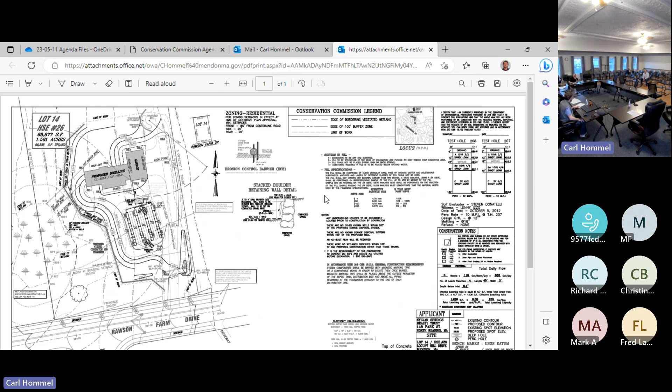All right, so here is the plan for 26 Rawson. This is the notice of intent submitted on behalf of Sylvan Springs Realty Trust by Fred Latham, their engineer, for work involving a single family home. Take it away.

Finally back on, and everybody's got the information. So this is a single family house, lot 14 on the subdivision plan, house number 26. This was one of the lots in the original subdivision that was approved back in 2006.

It is a 6-bedroom house, so for the septic we were able to design the driveway, septic, and placement of the house so that we comply with all the conservation minimum setbacks, as far as building setback and no-disturb area. The no-disturb is outside of our work area.

This has been approved by the Board of Health, and the state DEP Wetlands Division has issued a file number with no comment on the filing. So I'm hoping we can answer any questions anybody may have regarding the design, and move forward with the project. If anybody has any questions, I'm ready to answer them.

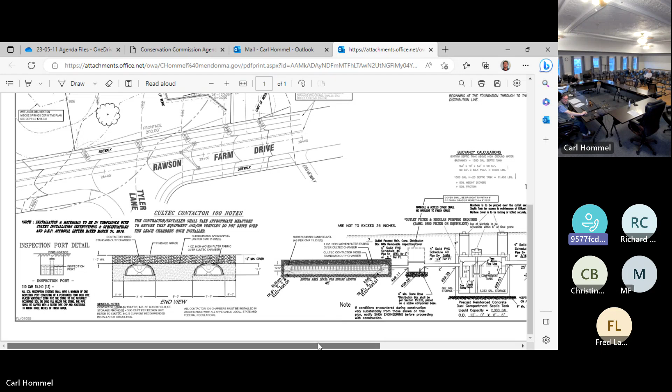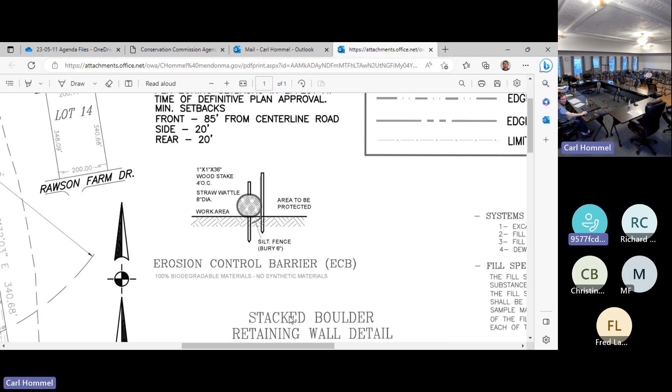In one area we had to provide about 42 feet of boulder retaining wall so we can meet the minimum distance of 25 feet from the wetlands. I can see that we do not have the construction detail of that erosion control. Oh yeah, you have it right there — this is how the silt fence is. Just want to see it. Yeah, there it is.

Something like that. Now, is the boulder coming off the property itself, Fred? Could you repeat that? You're showing us a boulder wall, stone wall — is that coming from the property, or are they bringing stones in? If we find them during excavation, we'll use them, but they have plenty of places to find large boulders on that site. Usually when they're breaking up rock for the roadway, they have a stash pile of boulders suitable for these boulder walls.

We have vegetative cover wherever we can, but in a short section we like to avoid the wall if possible — it's a maximum of 4 feet. I think this one is a maximum of 3 feet in the construction detail. 3 feet. Fred, is Gentis still doing the site work up there?

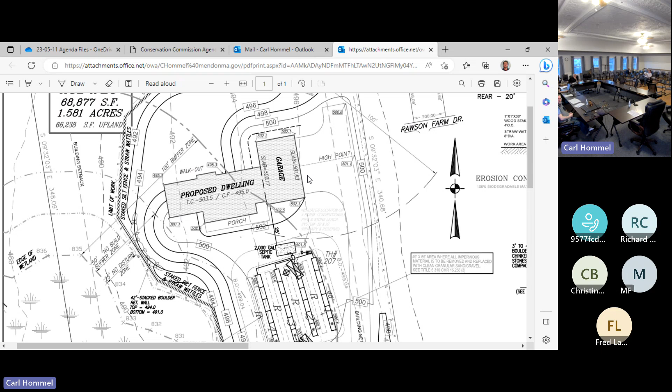We haven't shown any downspouts, but if we're out more than 50 feet from the wetland, the downspouts come to daylight. If they're underground, they'll come to daylight within the work area and be part of the runoff. If it's roof runoff only, it's considered clean runoff — rain not mixed with roadway flows. We allow that to travel over the upland area down to the wetland, since there's so little flow in a downspout, there's plenty of opportunity for it to spread out.

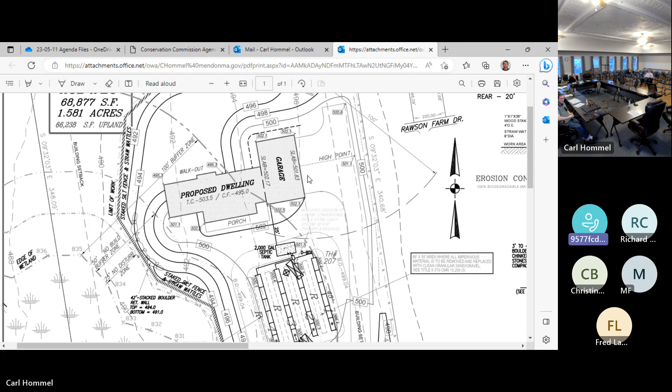Most of it will go back into the soil, and what doesn't will be overland flow to the wetland, just like rainwater. Okay, I don't agree with that for a downspout — if you connect the downspouts into a French drain around the whole house with a walkout in back at 495, your concrete is going to be down low. It'll be hard to get it to daylight and keep it within the limit of work, won't it? No, because the house is up in elevation — the cellar floor is at 495.

I'm sorry, what was that? Tim's telling me the standard practice is not to put downspouts into the French drain — but you're saying you would be putting them in? Yes, all of these houses going up this hill will have foundation drains. But they don't necessarily go to daylight — is that what you're telling me? No, they do go to daylight. The downspouts won't be directed to the foundation drain.

They'll just go to daylight as soon as they can. The cellar floor foundation drain is going to be below cellar floor elevation of 495. At the edge of the disturbance, the limit of work, we have an elevation of approximately 491, the existing grade. So there's plenty of vertical separation between the foundation drain, and it will daylight in that far left-hand corner of our work area. That is elevation 491.

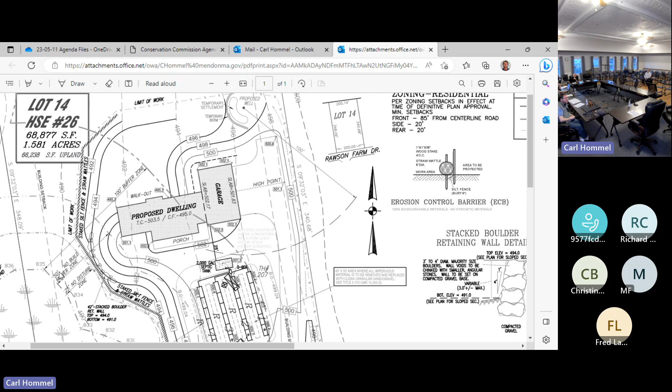If we're talking about the house drains, I wanted to ask about runoff from the driveway. The high point of the driveway is right on the edge, 501 feet. My concern is what will be done to make sure the water from the driveway near the garage doesn't get diverted across the septic system area and flow quickly into the wetlands. Is it going to be graded so the water flows down the driveway or off to the side, the far side of the driveway?

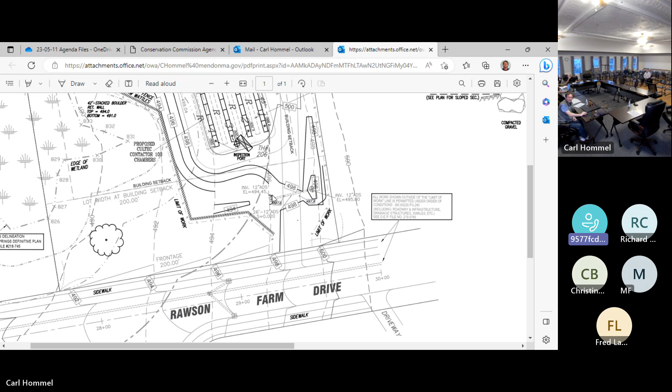At the bottom he's got a swale there, with a grade down. Most of that driveway has a swale on the uphill side, so the overland flow that would come from lot 15 and go through lot 14 is allowed to continue to flow, and it's diverted by swales to the right and left of the house and septic area. The swale continues down the driveway towards the street, and we have a low point where the pipe elevation is 495, and it goes under the driveway, kept up so the swale can be built. The low point of the driveway is at the edge of Rawson Farm Drive.

So that flow will be cleaned through the function of the detention basin that it's directed to.

Sorry, what? Pardon me? It gets turned off. I just heard part of that. I'm waiting until we can fix his phone line.

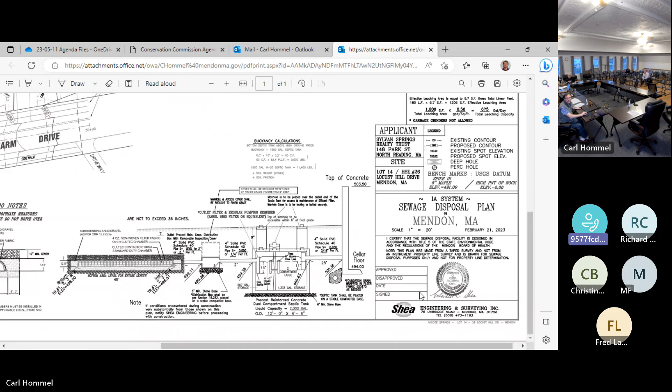On the diagram, when there are two short dash lines and then a dash line going the opposite direction, does that mean a swale? No, that's the fence. Those arrows are flow directional arrows. I believe that's in the legend -- well, not the legend exactly, it's not shown in the legend that shows test hole symbols and such, but it is a flow direction arrow, and we label it as swale.

Most of it goes to the front, part of it goes to the back, so it's spread out somewhat by that. So the expectation is the water would flow down the driveway, get to this point, and then get diverted into the street area. Yes, it's a continuous down pitch right to the pavement on Rawson Farm.

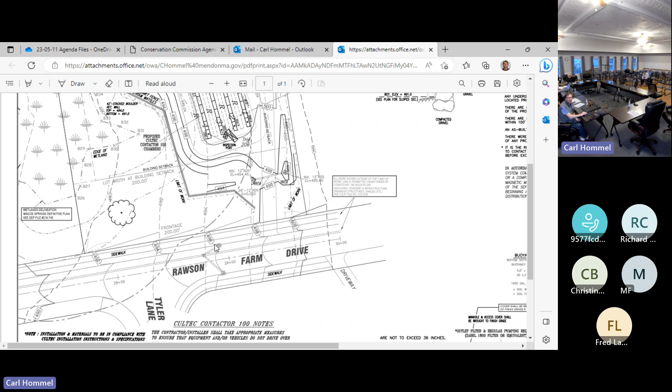Is there a storm drain somewhere along the road someplace? Yes, those two there, catch basins. Okay, great. So I figured -- is the highway department going to be okay with you diverting all the water onto the street, Fred?

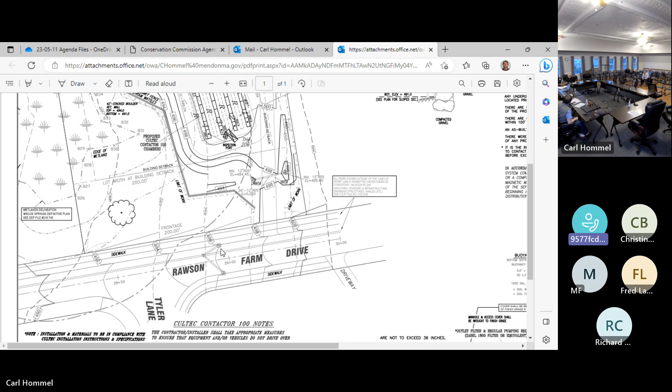Yeah, it's part of what we do all the time. It's part of the drainage design. When we came in and got approval for the subdivision infrastructure, that drain system is designed to take this water. So we do have that in our design.

Any other questions? The application has been successful at shoehorning in to stay out of the 25-foot no-disturb zone. I don't like having things done 50 to 100 feet out because of the lot and topography. So any other concerns, or should we have additional constraints since everything is getting very close to the edge?

There's documentation in the plans. I'm comfortable with it. All the work they've done up there to this point has been on all the lots. It's very conscientious of what they do up there, and they do a pretty good job at it, so I'm comfortable with it.

He's been doing it for 2 or 3 years now, and I have no problem with this, but let me just throw it out for general discussion. When you have lawns near a wetland, is there any instinct that we should limit the fertilizer?

We have done that in the past in our orders of conditions. That's a really hard thing to police. I mean, we can put it in there. Yeah, I know you need the phosphorus to get the lawn started, but once you get it established, you shouldn't have a problem with that as a deed restriction.

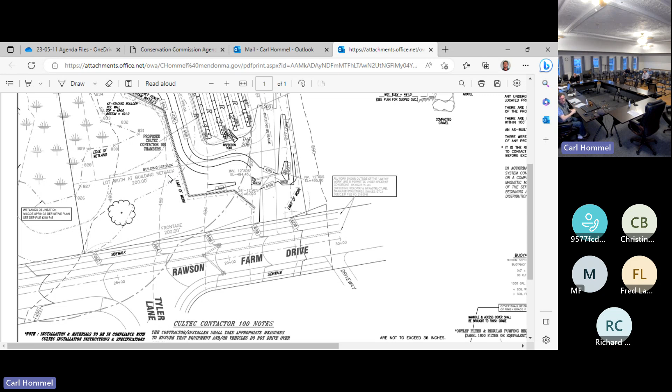I wouldn't mind, because this is like a big lawn, and I imagine they're going to have a nice lawn. We can add it to one of the lines. So I would make a motion to approve this subject to a minor request for no fertilizing after the initial installation of the lawn, in the buffer zone or something like that.

It's probably mostly in the buffer zone. Not all of it is, but most of it is, yeah.

So in terms of Susan and I knowing what's happening, approving the notice of intent, we would ask Fred to write up the order of conditions for us to approve at our next meeting. Sounds right.

So Fred, are you comfortable doing the paperwork since we don't have a clerk? Absolutely, we've done it before. Yes, we can prepare that.

Since you've already taken into account our usual issue with protecting the proposed well area, we would just have that one line about phosphorus and fertilizer. And you should be able to work with Susan, especially now that her grading hill is almost done, to make sure the paperwork gets submitted appropriately with the Mass DEP portal.

All right, so now I'll entertain a motion to approve the notice of intent with that one clause. Is there a second? Second. Any further discussion? All in favor? Aye. Opposed? Passes unanimously. Thanks for coming, Fred.

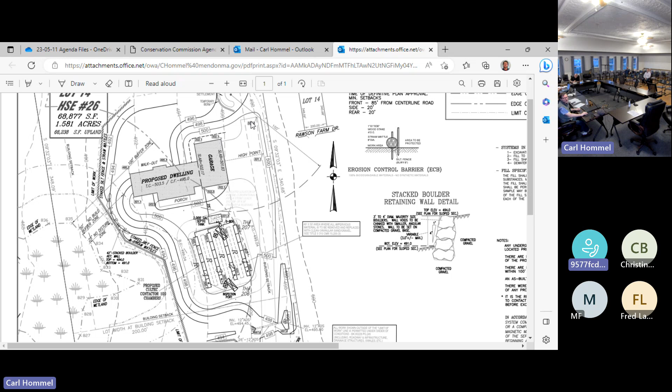Glad we were able to overcome that and get everything working. I'll try to get this camera going before I come on next time. It's a new computer, I just had it built. But I have direct access to my office and to you guys.

I'll try to get it all operating properly for the next time. Hopefully next time I'll be able to come into the meeting. It's a lot easier conducting a meeting if you have somebody there in person, able to hear better. All right, okay, thanks a lot.

Thanks, Bud. All right, we'll move on to the other one, Blackstone. DEP.

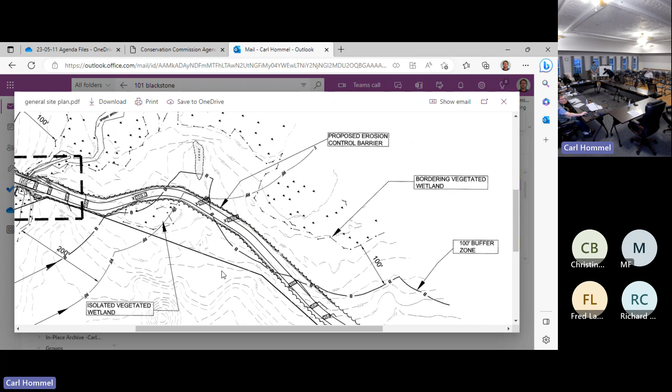Pipe will sit at 358, which is right. So what's the top of the road elevation going to be? It's about a foot. Well, it better be a foot at the bottom of the pipe. Is 358 the invert? The invert is at 358. That's correct, and you're putting in 12-inch pipe? So I apologize, no, the top of the pipe will sit at 358, so the bottom of the pipe will sit at 357.

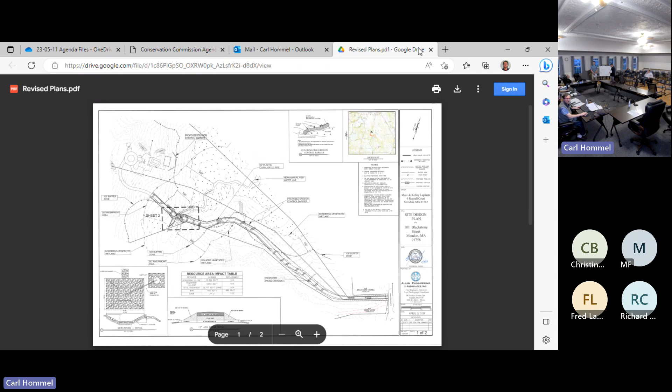I see the issue, gotcha. So I'm hoping the pipe is going to sit at the channel you dug next to the ditch, right? You could either dig it deeper or fill it, or I'm assuming you're gonna put it right where it sits. I don't know what that elevation is, but you need to figure out how much space is needed between the pipe and the top of the road so it doesn't crush the pipe.

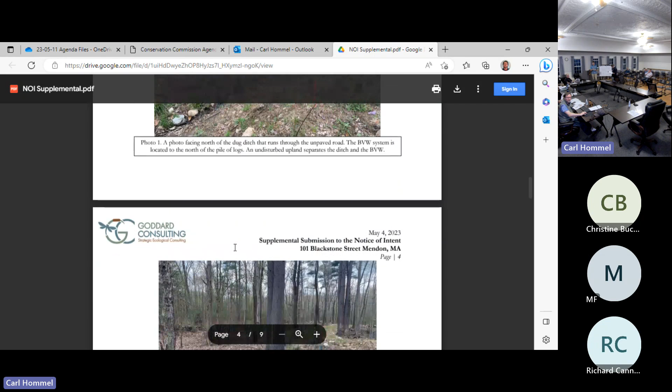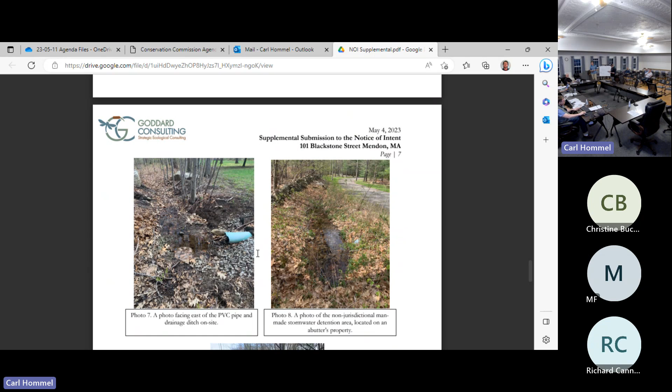Photo 8 is some kind of stormwater detention basin that he had dug to prevent the water from either cracking his driveway during the winter when it got cold. So he installed a pipe that led to our client's property and fed the water from his man-made detention basin under the driveway lawn and then spewed out into this forested area here. So what the water has done is created somewhat of a naturalized channel, which you can see in photo 7. That's on our site, and the PVC pipe is leading water out into the forest right there.

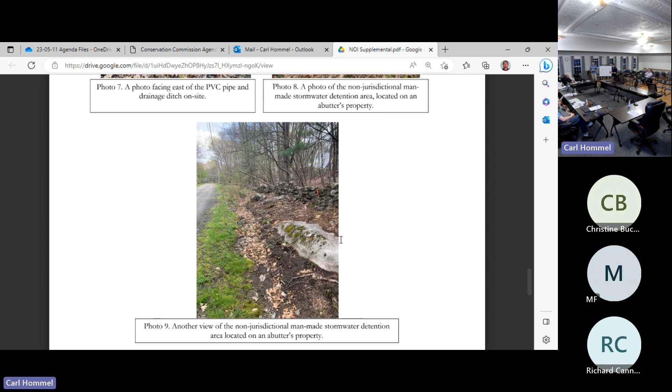Photo 8, for whoever's on the Zoom, that's the detention basin on the abutter's property. It was holding water as I was out there after a large storm event that was on May 1st. Then photo 9, if you scroll down a little further, that's just a bit upgradient of where the stormwater basin is on the abutter's property, just to show you there's no wetlands located upgradient of that at all. So I don't believe this is any kind of jurisdictional resource area. If you could go back to photo 7, because at the site...

Cinnamon fern, is that an obligate? Is it back up? So cinnamon fern is FACW. However, in Massachusetts we need two criteria for it to be a wetland. That also being said, the stream is located upgradient of any wetland resource area. And in the regulations, it says that any finger of a stream is not considered a stream if it's located upgradient of a wetland. There is no wetland, in my opinion, downstream of it, but just to get that out of the way, this stream does not qualify as a jurisdictional resource, in my opinion, based on the regulations.

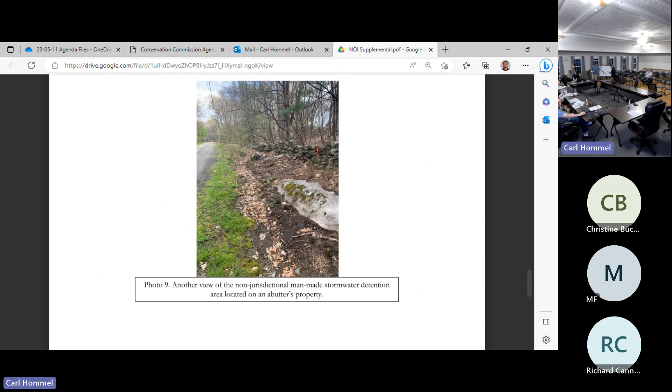It's not... this is the upland area right here. Correct, that is the stormwater ditch that he dug. Is that upgradient of this property right here? I'm not talking about that, I'm talking about the other side of the driveway, where the pipe goes under the existing driveway and then goes into some rocks, that picture on the left. Okay, now it goes off to the left.

It's not a real clear channel, but as it goes off left, it goes into an area with cinnamon ferns and it's tufted. When I see tufts, that says wetlands to me.

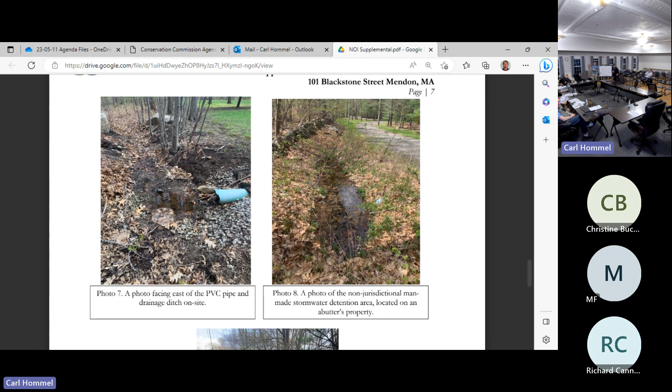If you look on page 8, that's my auger in a hole I dug down gradient of the stream. Can you put that on the map where you dug that gradient hole? The pipe comes in, the channel runs down adjacent to the road, and then the water percolates out into this open area you're seeing right here.

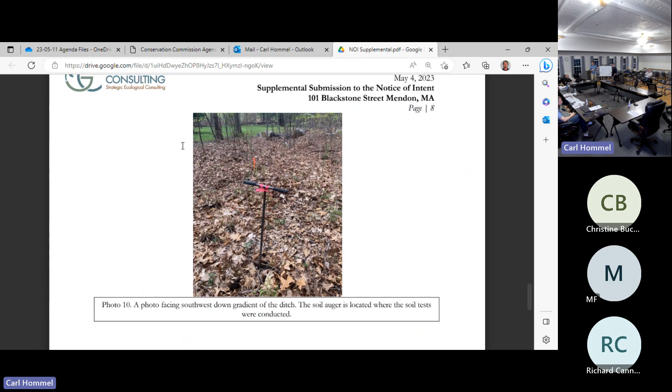It's just leaves from the oaks above, which are an upland species. Getting back to it, this is just downstream of where the water comes out on our site. That's my auger in that location. If you flip to page 9, you can see that's an upland soil I pulled from that same location where the cinnamon ferns were seen.

In Massachusetts, we need a wetland soil and a dominance of wetland vegetation for it to classify as a wetland. My opinion is that area is not a wetland, strictly because even with the cinnamon fern, there is an upland soil pulled here, so it is not a wetland under the Massachusetts Wetlands Protection Act.

Could it be a potential vernal pool? No, this is a very flat gradient area, so if there's any water, it's just going to spread out across the land.

What about the other parts, where there's this disconnect between the wetland and the stream? I don't think this area holds enough water for it to be a wetland or a vernal pool. But you could take a look at it next spring.

We're out of the vernal pool season now for that. However, it is leading out, so there's not much standing water in there because of that stream that was dug. It's kind of emptying, so it's not holding very much water at all.

What's the definition of the quantity for an isolated acre foot or something? Isolated land subject to flooding is an area that holds a quarter acre-foot of water, and this area is far too small to hold that.

That would need to hold at least 10,000 square feet of water at a foot deep, and this is not nearly large enough for that. So it's not a quarter acre. No, it needs to hold a quarter acre-foot of water internally.

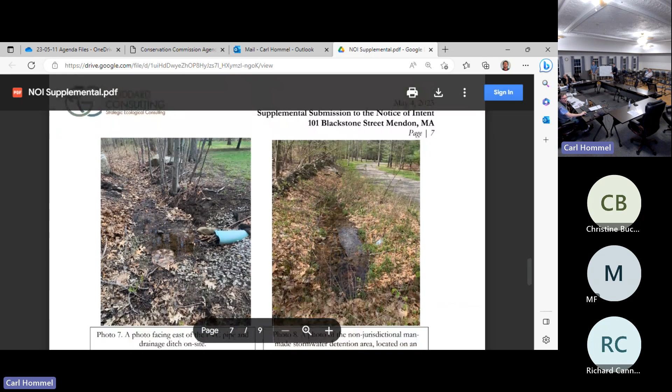So I'm not sure when he dug that ditch. We dug it when he built his house. No, this ditch was dug more recently, and someone's put stone in preparation for doing this.

How old is the house? Fisk has owned it for many years, and he's got machines. He put in the driveway recently, but he also put in this road. That road has been improved significantly.

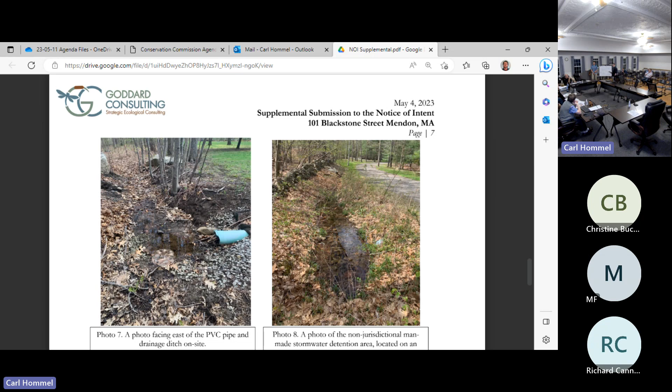But either here or there, I would like a little detail on the volume of that isolated wetland, that's my issue. It didn't have the 1 foot ditch. So are you guys okay with the continuance? Yes, or go way back to the beginning of the presentation.

One of the first statements you made was that there was some isolated wetlands and it's not connected. Is the committee comfortable with that? You're talking about page 3? Yeah, area 1 is what it's called in that packet. Is that page 3? Yes. So I did have a question on that, actually, going back to that.

Was that whole area excavated at one point? I see the trees pushed over to the side, so it's like the soils have been moved around. I don't know what the soil or the area looked like prior to that, or where the ditch was. I didn't flag this wetland, so I wasn't aware of what it looked like prior to the conditions I saw it at, which was May 3rd.

Was there any augering in this area? I don't think there was gonna be an auger, and I don't think there would be conclusive evidence because that was probably just like 6 feet of topsoil. That area is what I was calling a road, but it's just basically a large mounded area of dirt that follows this line right here. The area where I did the augering was the natural area north of the road, and that's where I pulled the upland soils, an undisturbed section of forest with trees with DBHs of 15 inches at least.

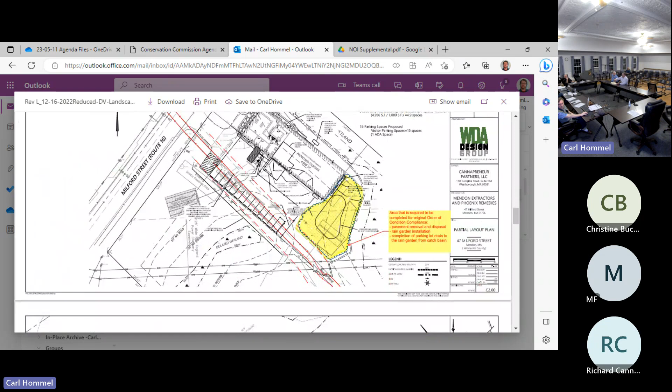Yeah, it's a significant upgrade to the property, about $100,000. We're digging out the back, putting in trenches, putting in water collection systems. So the drainage isn't complete then? The drainage on the main part is done, it's just the back part we couldn't do because of the weather delay in the spring. It's finally nice enough to do now. It's just a scheduling issue, we had planned on doing it in April, but it just didn't happen.

I don't know what was discussed, I don't think it was at the meeting in January. I was not there. So everything that was required here, there's a new channel that's already done in this parking lot. We had absolutely no flooding during the recent downpours that we've had.

This front part is completely done already, it's just this back part. We're ripping up concrete, we're putting in this rain garden, and the drainage is coming out over here. We're working around Kinder Morgan, there's a 4-foot high pressure natural gas pipeline across the property, so we're working around that to add this in. This will take a solid 5 or 6 days to do. The flowers themselves, the plantings, might take an extra week because they're just not available.

Is there a swale coming around that gets into that? Because where's the water going? The water comes down both sides, comes down here and also runs down. There's a deep drop off from, this is the edge of the property.

There's a deep drop off here. So the water comes here and then we put a channel in here, so any runoff here is going to go right into the rain garden.

I have no problem offering a partial, conditional upon completion of the rain garden, the rest of it. I mean, there's still work to be done, but.

So your parking lot's all paved? Parking lot's been paved, yeah, we striped, handicap stuff's in. We had only stripes on some. Some have come off when they have to bring in some pretty heavy equipment to do the rain garden, so when they come in we're gonna have to restripe it again, but we're gonna restripe it because it just looks better.

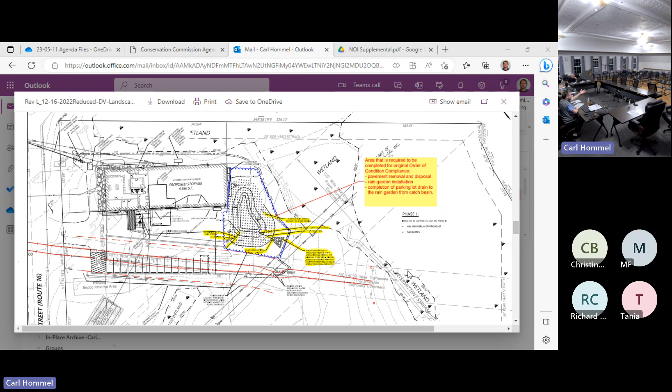This is for 35 Taft Ave. It's pretty much an administrative procedure. I've spoken with you, Carl, and you, Susan, on the phone. The nudging has been going back and forth, and I'm just trying to get everybody to get this project wrapped up.

Somebody went into the town portal and pushed the button, so that actually just got cleared up. Somebody clicked it at the beginning of this week, but John Erickson just clicked it this afternoon, a couple hours ago, so the demo permit is officially in place.

This is just in regards to the conservation part of it. Last time I was here with the engineer, we presented the whole project, it was approved, and there were no conditions, because the engineer had asked if we needed to draft up an order of conditions, and you said no, we're good with the plan. Your well is far enough outside the demolition zone, far enough from the lake, and he has the erosion control done on the place, everything's been put into place.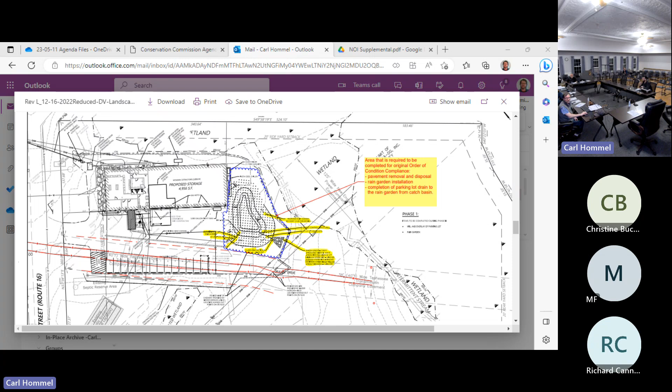I was talking to you, Carl, and you said if there's no order of conditions, there's something else that usually gets put in place. A negative determination, that was the word I was looking for. There was something that goes into place when there's no order of conditions, and that was it - even though it's like a lake, a negative determination that you're doing work in the buffer.

You're not doing work in the wetland, right? And you're keeping as far as possible, right? So you don't need any... well, no, we need a determination of negative. Okay, I filled out the OC one.

Is this the one with the stucco house? Yes, and that's being torn down, right? Correct, that's the demolition. Can you give us your... and you have a file number for DEP? Yes, correct, I've got that posted up.

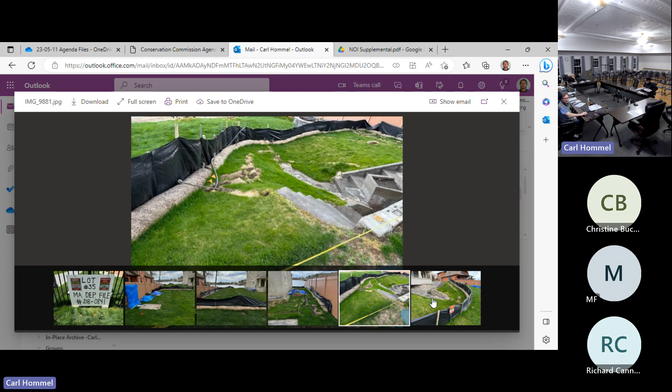Well, then it's not a negative determination. He's got the number and everything. So it's not negative. Right, so we do have to write up the order of conditions and sign it.

Well, I started it, I just wasn't quite sure what areas. Are you waiting for the conditions? We've already done everything on the front. We expected that. We still don't submit this to... well, we still gotta sign it.

Yeah, let's get your paper. Yes, I do this. Okay. And what about the rest? We can do that at the end along with everything, or have someone else do it. All right, so sit around and sign. So we can do this after, right? Yeah, I can stick around.

Oh, did you want to take it with you? If you don't mind, yeah. Well, we gotta make copies and everything. Okay, I can wait if you want to take it. Next one we can. No problem. See what you paid for today? Yeah, there's someone on Zoom.

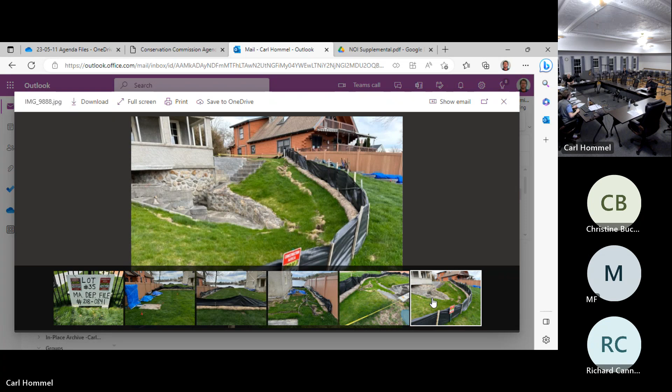Some lush green grass you got there. Good.

Okay, so let's go back to teams. Rich Cannata, I see that you're on here. You are looking to have a discussion with us about proposed tree removal at 50 Blackstone. Correct? Yep. Okay, so let me go back to bring up the email that you sent with stuff. Sounds good.

I don't want to do that. Based on Google Drive.

I have no idea what my Google password is. Oh, we don't remember it. Well, I have it built into my browser... not here though.

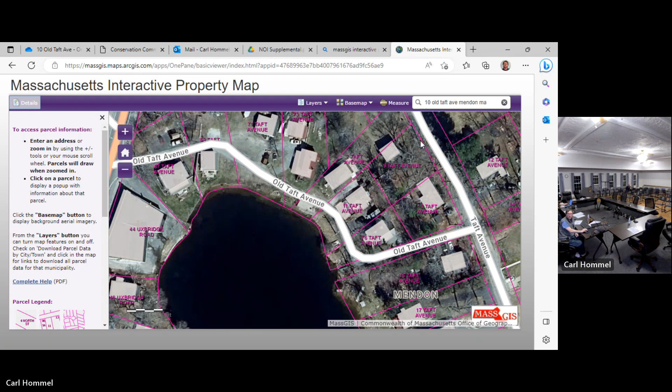Yeah, whereabouts? Old Taft - it's got to be 71, maybe, or 73, or what's the other one? Okay, so could be that one. Click on, could be 7 - click on the square boxes. Here, exit out of that. Click on this, could be 7, click on that, and then you can zoom in a little bit, not too much though.

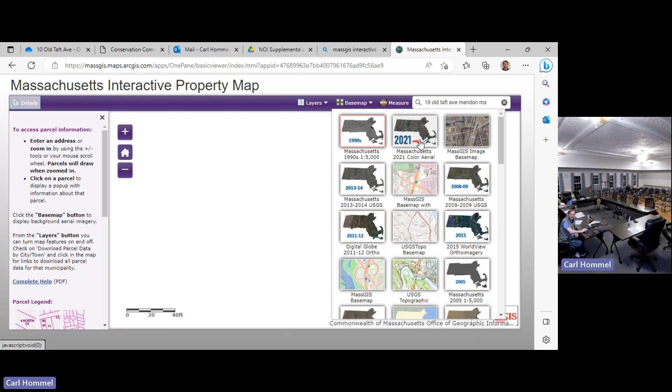All right, so we're looking at the pole - here's that pole on the corner. Someone was digging right in here, I think, so click on that. You'll have to click out of this, yeah, out of that, and go right back into this one here. Maybe zoom out a little bit. Yeah, okay.

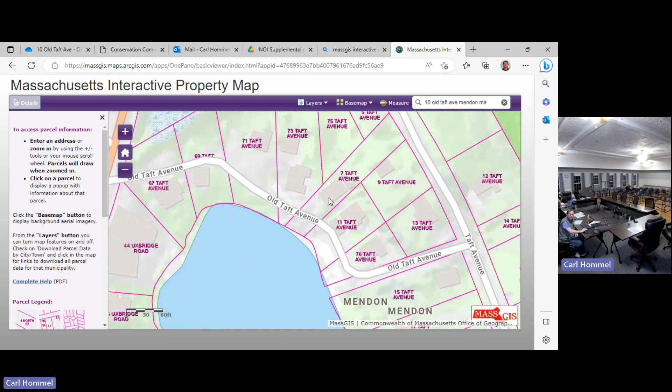Just click on one of these properties - it could be Lambert or this one here. I'm sorry, this one, that one - the Yacht Club, well that's the yacht club. It's either this one or that one. Okay.

It's either 73 or 71. Which one did they... I'm not sure. One of those.

So if you look at 75, they have no beach, so I don't know, you think it would be that one? But they don't own it. That's the name someone put out there. Is that the person, would they be having the pipe coming from their property? I don't know, but I think that picture that was sent a couple weeks ago, wasn't that the name that was on that?

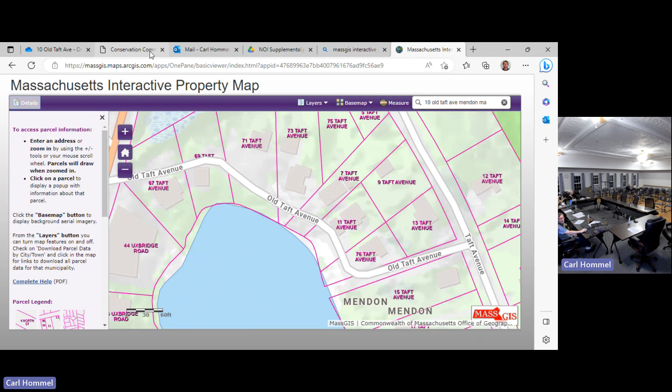Anyway, I'll work my way back and work with people in town hall and figure out what the letter should be. All right, any further discussion on 10 Old Taft?

Okay, last one I believe, Lake Nipmuc yearly weed treatment. Got a nudge from Dan Breyer, because he doesn't want to have the beach closed this summer. So I said I don't have a clerk, but take a look, and he's going to see what the next step is in getting money taken out of our line item to pay for the lake treatment that they've proposed.

That who proposed? We got something from the treatment people? Treatment people sent us something back in January saying here's what we want to do. I said I don't have a clerk, hold off on it. Well, Dan is saying he doesn't want to hold off on it, it's always a timing thing when they open the beach. So you've tasked him to review it and make recommendations? It's the same as last year, since there haven't been any material changes in lake condition, or we heard about it in the papers, we'd be going ahead with that.